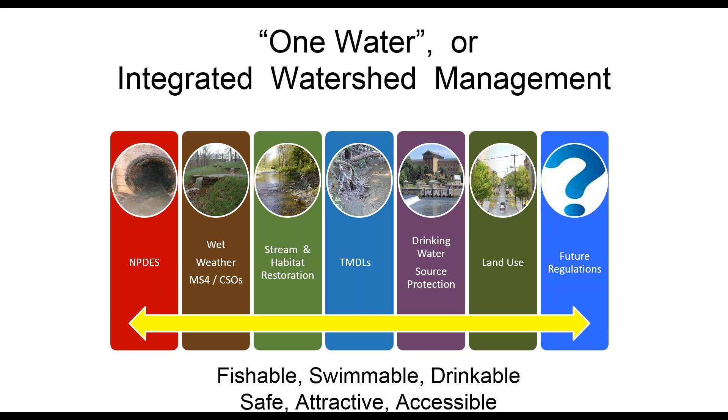And by that I mean, the Clean Water Act calls for fishable, swimmable. The Safe Drinking Water Act calls for drinkable. And somehow we've got to bring those things together and say Clean Water Act, Safe Drinking Water Act, we're really all about the same thing. And never forget the mayors, who are interested in safe, attractive, and accessible. And bringing all that together into one theme is something I'm really looking forward to doing. Next slide, please.

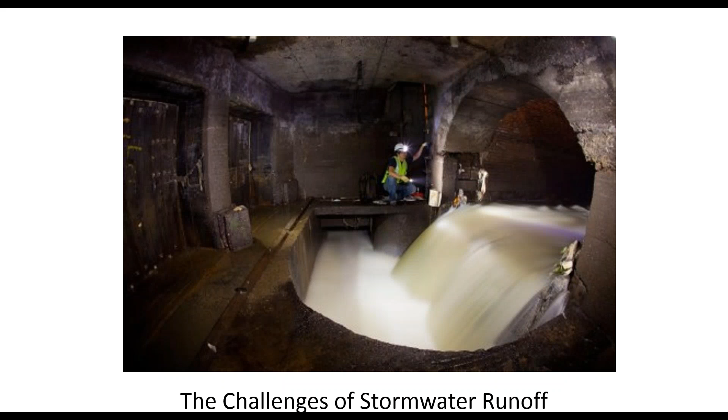This is actually a sewer overflow chamber from New York City. Basically, when it's not raining, that's the sewage water going down from the outfall in this chamber and into a pipe that takes it to the wastewater plant for treatment. What's interesting is that even a small rainstorm will fill that pipe up, and that man better get out of there pretty quick, and push the tide gates on the left-hand side of the screen open and dump the water into our rivers. And that's the problem we're trying to solve: how do you deal with so much rainfall? Next slide, please.

So how do you keep sewage water from overflowing our pipes into the rivers? Well, the first opportunity I think has passed us by. We can't make it stop raining so much, except maybe out west, but on the East Coast we have not been able to do that. The second way of doing this is to increase the sewer capacity, which a lot of cities have been doing, which means basically increasing the capacity of your sewer system to be able to handle the additional amounts of rainwater that are coming in.

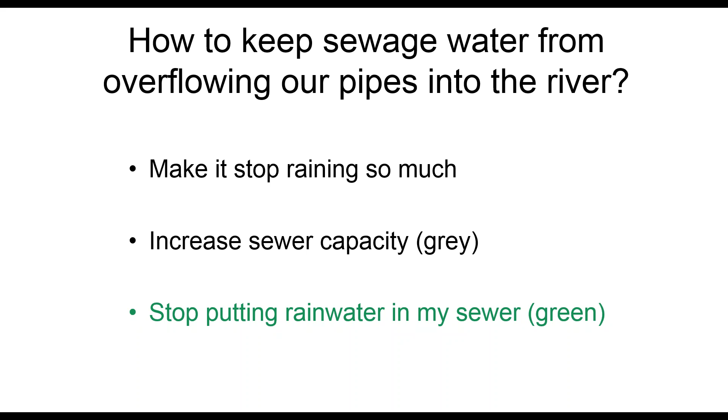And the third way, which is the newer way, is to stop putting rainwater into the sewer, and that's the green fashion we'll be talking about. And it's a fascinating way: instead of increasing capacity, you're taking the existing capacity of your system and decreasing the demand on that capacity. Next slide, please.

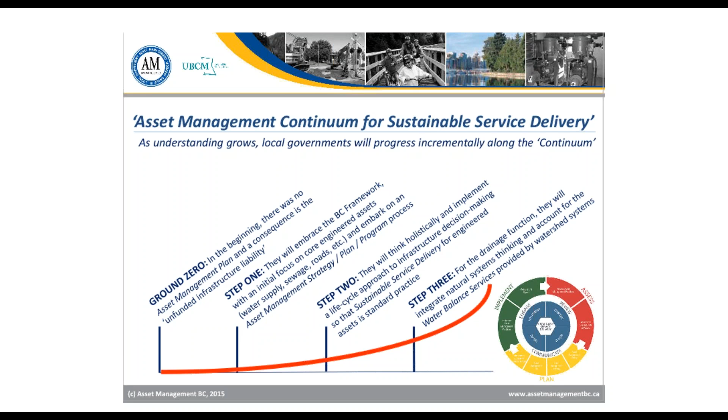Public retrofits means any opportunity where the public owns the land, might be a library, a school, a firehouse, and there is either a new building going in or a retrofit going in, and looking for opportunities there to work with those facilities to implement green infrastructure there.

The redevelopment piece is basically development regulations placed on all development in the city of Philadelphia, and as of today we're capturing about the first 1.5 inches from every new construction that occurs, and that's been a great accomplishment for us. It's about 0.4% of all the impervious cover in Philadelphia being managed additionally each year. So it's been a great program for the city.

The final program is really incentivized retrofits, which really means talking about private land ownership and creating an economic incentive for change on private land for stormwater management. And the key to that is setting up a parcel-based stormwater fee system so that you're actually creating a value and a credit for your stormwater. Next slide, please.

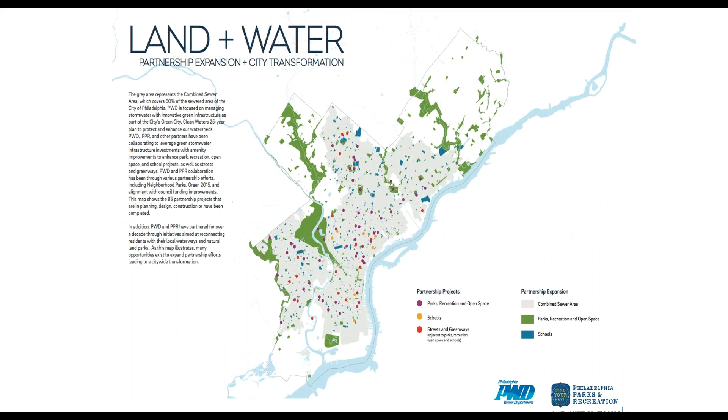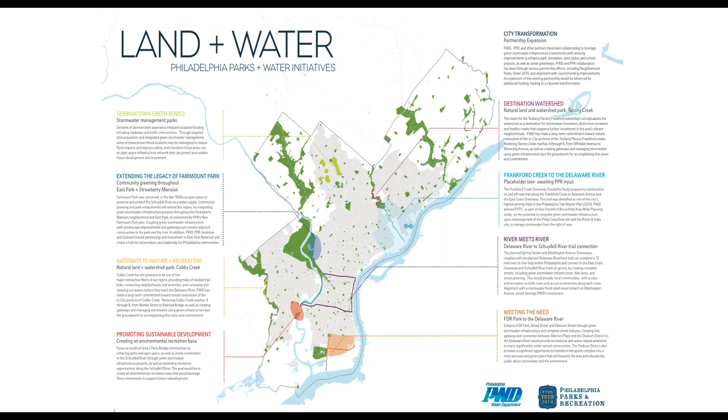Another way to look at all this is in terms of big programs, and whether you're talking about city transformation or making a destination watershed or whatever it may be, from these bigger concepts take not just a project, but look at an entire community, entire site, and say, here's how we're changing the world. Next slide.

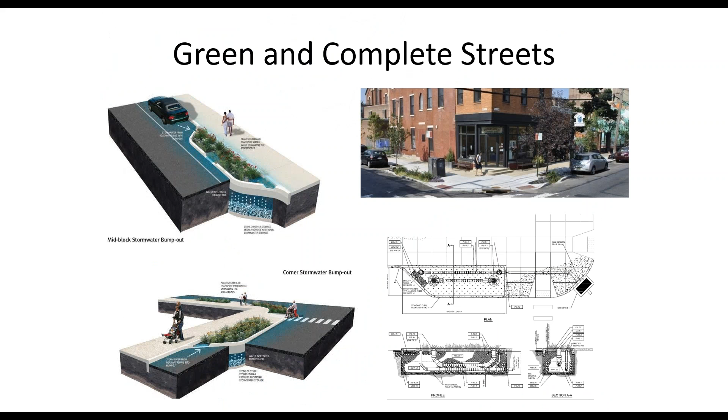Green and complete streets, you can see here that we're showing how green streets work, but what we want to do is have complete streets, which means when we build and rebuild streets, we want to also deal with pedestrians and traffic and bicyclists as well as with water. Next slide.

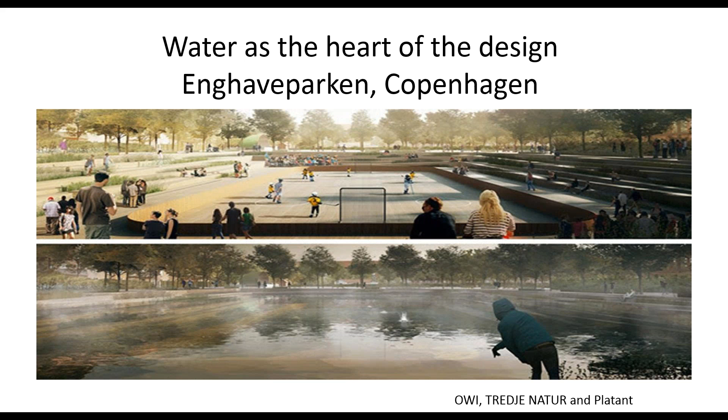And Mr. Thompson from Copenhagen points out that water is used as a resource to improve urban life. We look at Copenhagen as a hybrid city where you can fuse nature, urban biology, and human beings in a more appropriate balance. I think that says it all right there. Next slide.

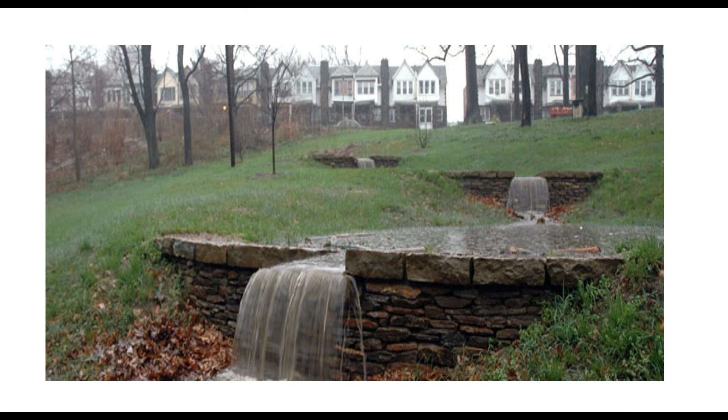This is actually street runoff. This is water that is coming down the curb and about to go to a stormwater inlet, and instead it's diverted into this park. We made this geometry here to make a pleasant thing out of the water, keeping it out of the sewer, and eventually this goes into a wetlands at the bottom of the park. Next slide.

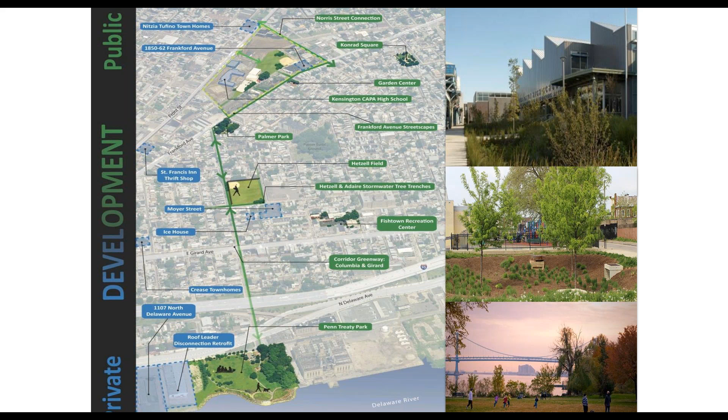This is just showing how we're looking to take these individual projects and start to put them together into a top triangle on the top left there, where a lot of stormwater management was done through different means, private development, public development, and starting to make that connection to the Delaware River by having projects going up and down and following along and then ending up at what's called Penn Treaty Park, and making that connection between land and water. Next slide.

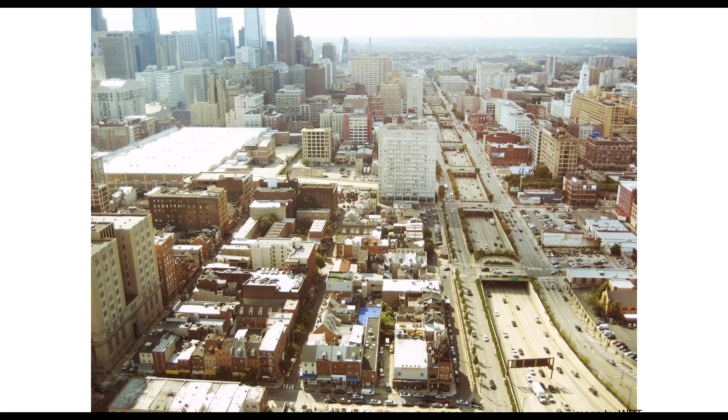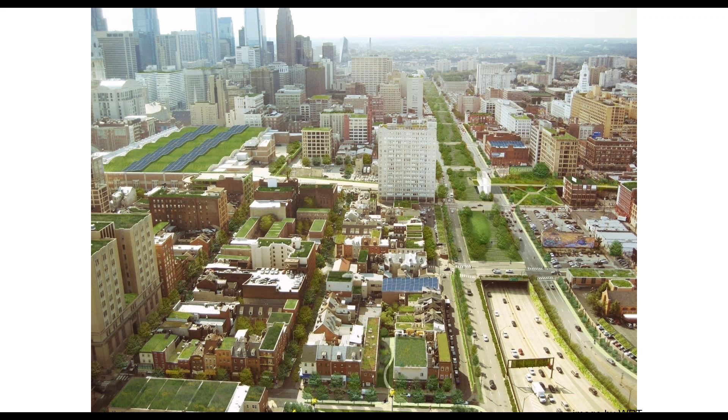A lot of the work that we did, we were able to do because we used some visionary materials early on. And this is one of our earlier pictures. This is a shot of Philadelphia as it was 5 years ago. Next slide. And this is just an idea of what can be. And it was using photography like this that captured people's attention and captured their imaginations and made these kinds of projects move forward. Next slide.

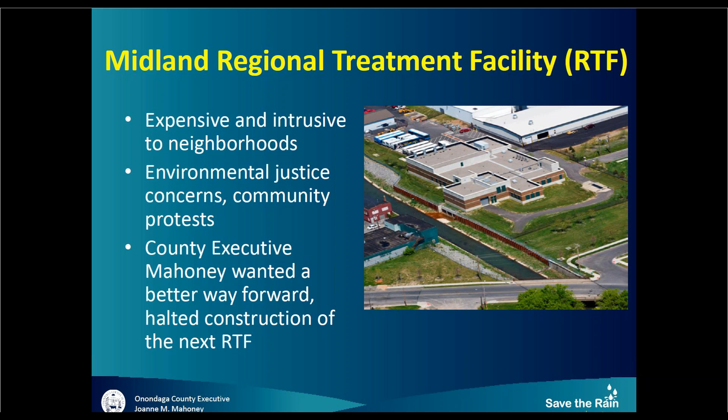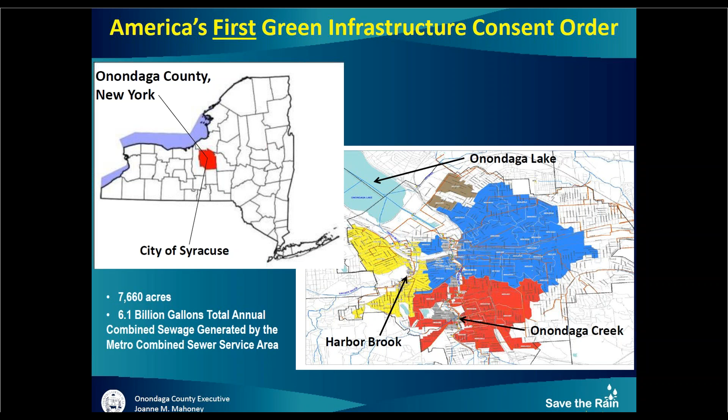Next slide. And we entered into the first green infrastructure consent order for the resolution of combined sewers. So again, combined sewers are shown there on our sewer sheds, the different sewer sheds where we actually have combined stormwater and sanitary sewer that would overflow into our receiving waters.

Next slide. And so with the combination of green infrastructure, as Howard talked about, we have this blended approach where we're merging green and gray, and we entitle our program the Save the Rain program. County Executive Mahoney's Save the Rain program really kicked into high gear in 2011 with the creation of Project 50, a goal to hit the ground running with 50 different projects. We actually put 60 green projects into the ground that first year. And today we have over 175 green projects. Combined with green and gray, we're doing about 96% CSO capture.

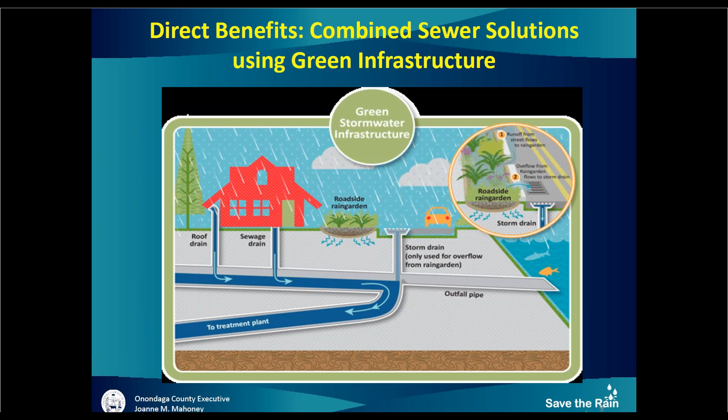So I want to talk a little bit about those water quality things. And again, Howard kind of showed you, and this is another one that shows you a little bit how these green infrastructure practices are the sponges that act to capture infiltration instead of it going into our stormwater system, which causes CSOs to contribute to the violation of water quality. Next.

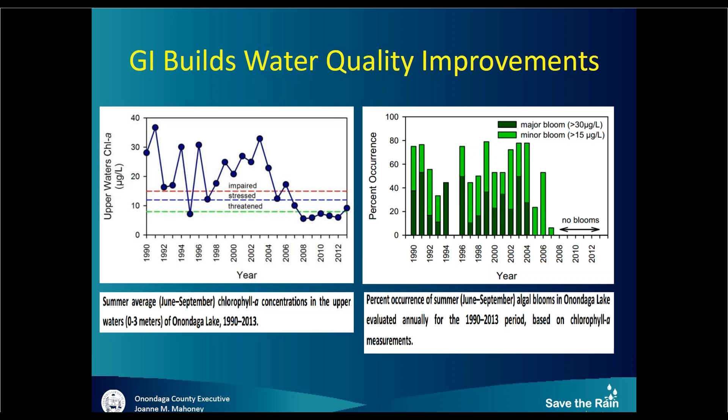And very specifically, we are seeing some tremendous water quality improvements based upon our green and gray infrastructure. And those water quality improvements shown here are in chlorophyll and algae blooms.

Obviously, the rewards of getting your water clean are important. So water quality does build civic improvement. And so when we have water quality, we actually have public investment. This is the Lakeview Amphitheater, which was completed last year, which is just a tremendous benefit for our community, made possible because we were able to clean up Onondaga Lake.

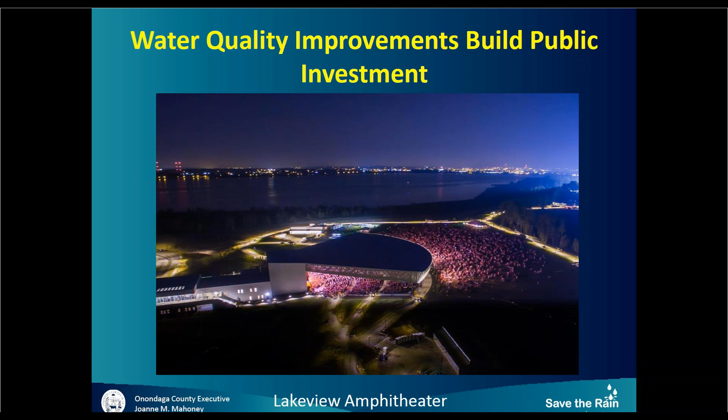Green infrastructure has really helped us kind of rebuild neighborhoods and rebuild public confidence. It was completely the reverse when we were going with a strictly gray approach. So I guess I want to reemphasize the fact that green infrastructure really allowed us to turn our program around. We still have an integrated program of both green and gray, but green infrastructure really allowed us to do things completely differently and restore public confidence in our program. Next.

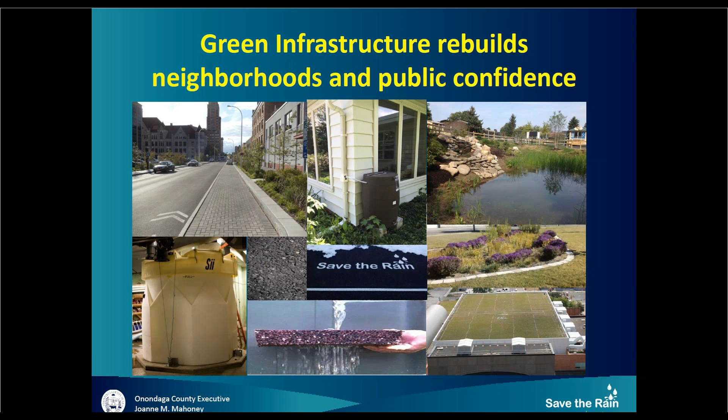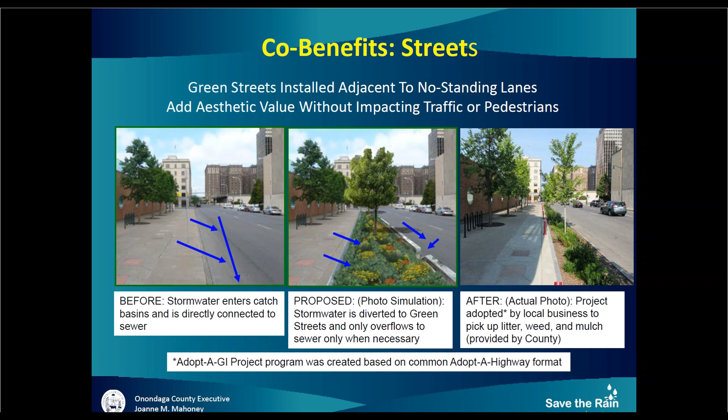The co-benefits of green, and I'm going to be a little more granular perhaps than Howard, but here's a typical green street and how a green street actually functions. That's kind of the before, the proposed, and then the actual after of a green street. We then also look for these aesthetic values without impacting pedestrians or traffic in a negative manner.

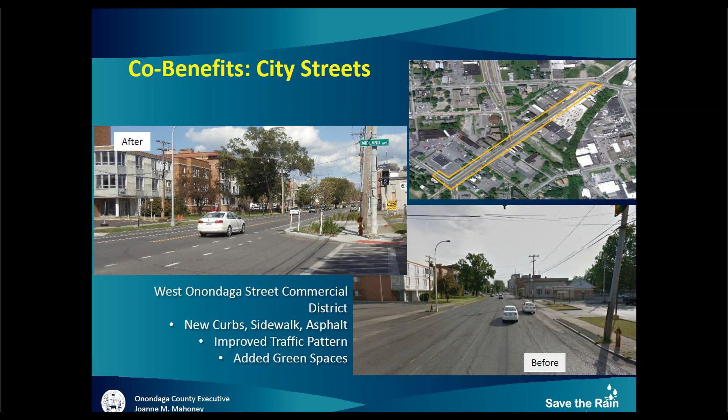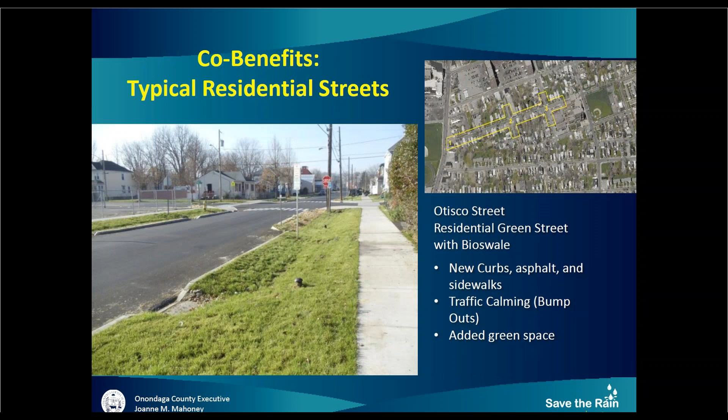So these green streets can happen anywhere. This is a typical light commercial area, West Onondaga Street, new curbs, asphalt, and then we're creating improved traffic patterns. Next, please. Typical in residential streets, you'll see the bump outs, as Howard talked about, that improves situations in your urban areas with a little bit of traffic calming. We added green space that improves neighborhoods, rebuilding neighborhoods.

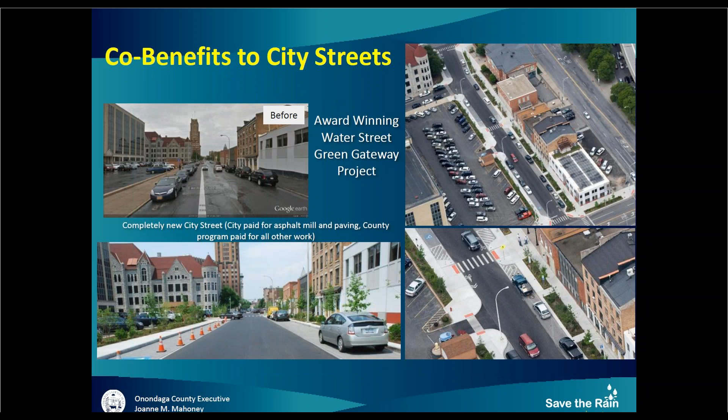Next. We can do this in award-winning projects like our Water Street Green Gateway project here, an urban gateway to our community. So we're taking one of the downtown urban areas and redoing the area with green and porous parking. Thank you. And it doesn't always have to be new. It's always important to actually think about there's usually some street extensions or some pavement that you're not using anymore. So there's pavement removal opportunities or huge opportunities to just re-benefit your community. Next.

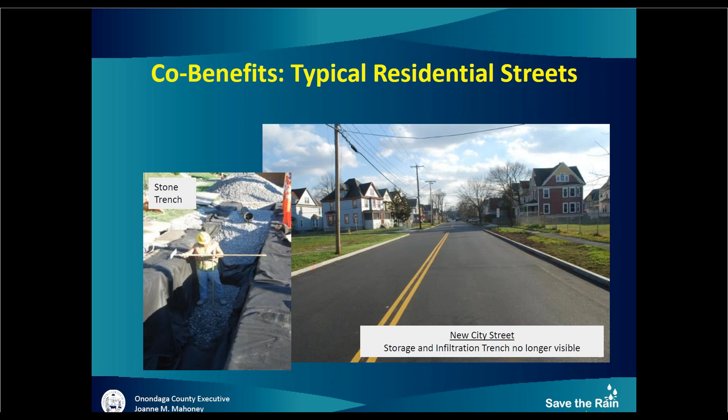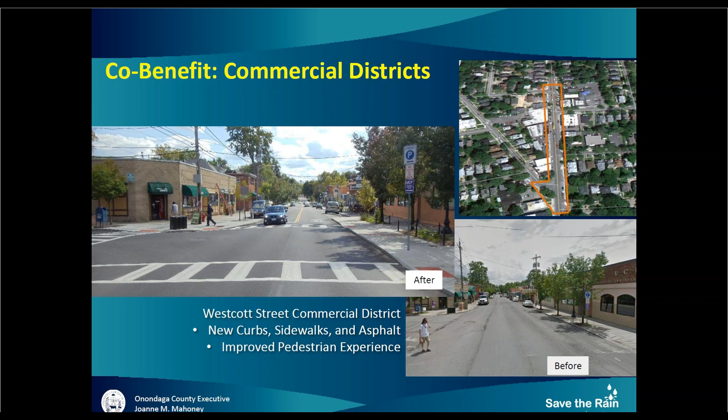Typical residential street, although it doesn't show up right away, you'll see that there's storage and infiltration trenches that are no longer visible afterwards. Next. And we benefit commercial districts here, the Westcott neighborhood. It's a kind of exciting little neighborhood. And before and after, we improved the pedestrian experience, improved the commercial experience in your downtown community with the co-benefits of green infrastructure. Next.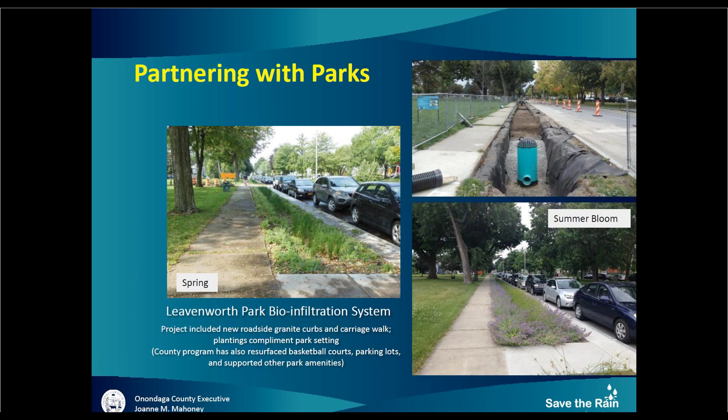Kind of roaring through these. Again, we also partnered with parks, so here's a typical bioinfiltration system that we put in Leavenworth Park. Nice little practice. Next. And here are the co-benefits of parks. Again, a rain garden where we're taking the rainwater off of the adjacent street and we're moving it into a rain garden here in the park setting, and it creates a very nice practice and also keeps our water cleaner by doing it. Next.

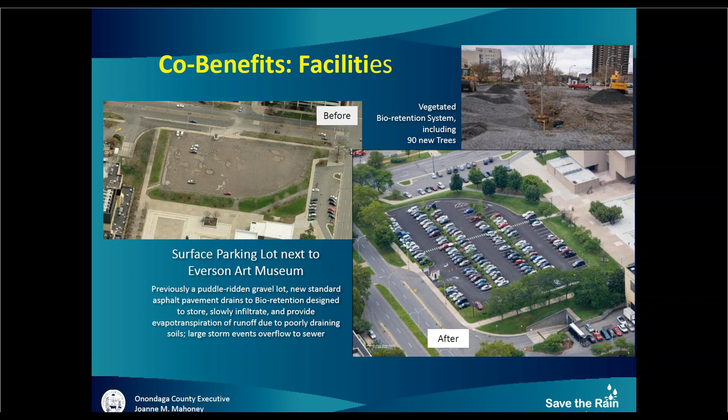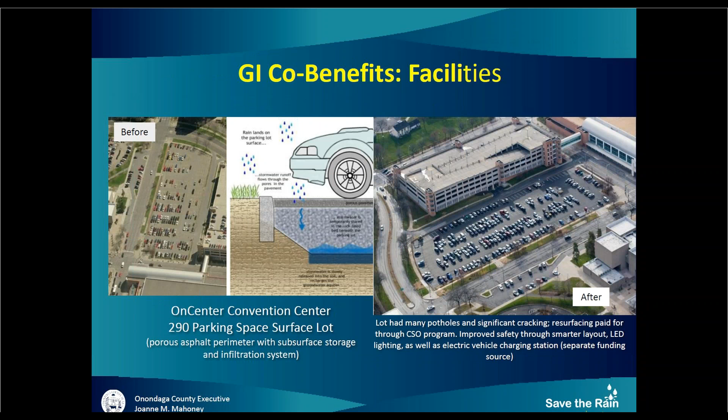And the co-benefits are many for facilities. In this case, it's a county parking lot in downtown Syracuse next to the Everson Art Museum, and completely transforming an old, pretty rundown parking lot into a brand new parking lot where we're using bioretention. Next. And around our downtown OnCenter, we have a parking garage where we have bioswales around the parking garage. We have porous pavement around the exterior of that open surface lot. Again, that infiltration, capturing the stormwater at the source, but also the co-benefit of improving the facilities of our Onondaga County Facilities Department. Next.

And so I guess I wanted to really just round third here, allow for some questions, and hoping that I can help you understand how our story perhaps translates to what you're doing. Green infrastructure really does help solve water quality problems. That's first and foremost in our goal. But this green infrastructure has benefits that go well beyond water quality.

Water quality has some serious benefits for the economy, but water quality also, through green infrastructure, allows us to communicate our message, soften our gray programs, it builds partnerships, it builds communities, it rebuilds neighborhoods, and frankly, it engages the entire community in many of these different practices, such as tree plantings and zoos and parks, where public education really becomes a key part of green infrastructure.

And again, that wraps it up for me. On the next slide, we provide our resources on SaveTheRain.us, and we have an open source for all of the 175 projects that we've completed. There's fact sheets, there's project plans, technical specs, and photos on every one of the projects at SaveTheRain.us. Hope I left a little time for questions.